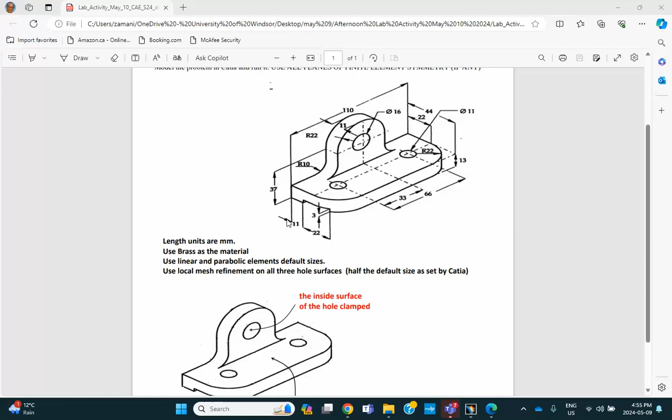Now you're told that you have to use as many planes of symmetry as are applicable in this particular problem. In this problem, it is obvious because of the nature of the geometry and the loading, there is one plane of symmetry, and that cuts this thing into two halves.

So what I'm going to do is make the whole model and then use an appropriate plane to split it or cut it into two pieces. If you want, you can also make half of it, but for me it's easier to make this thing exactly like what it is and then cut or split it into two pieces.

Okay, so the geometry is here, the dimensions are there, and I'm going to look at my paper, not go back and forth between these things.

So the strategy I'm going to follow is first I make this base - you see that base is the horizontal piece - and then add this tombstone shape to it, and eventually make a hole here by cutting it, pocketing it to create that little indentation at the bottom. So that's my strategy.

First, we start with the part file. Please make sure you save it immediately in an appropriate place.

So file, save management, save as. I've already made a folder called afternoon lab activity, May 10. So I'm going to put it there, and it's called part one. Make sure you don't overwrite other things by just being lazy and calling it part one, because there may be another part one there that you're going to get rid of if you do this.

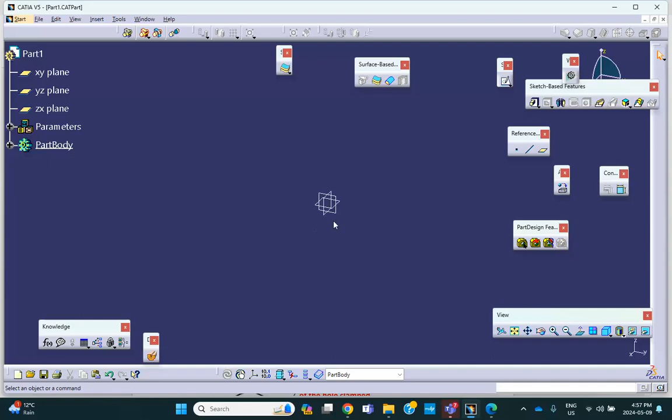But anyway, that's fine. So the units - assuming the units of this thing are millimeters - I have already changed my units to millimeters. You already know how to do that.

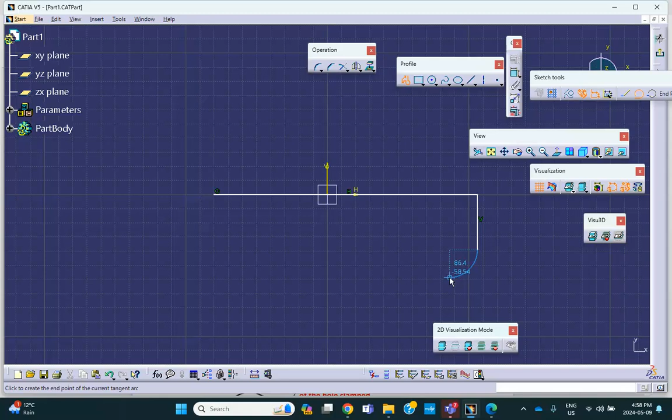So on that horizontal plane, I will sketch something that resembles that piece. Right now I'm not very fussy, so I'm just going to make something and then clean it up in a minute. Something like so, and there.

Okay, so let's see now: left line, control, right line, control, middle axis. I'm going to make it symmetric.

Okay, that's good. And then how about giving some dimensions here? Let's see now - this is 24, this is 20, sorry 22. So it looks like this size is 22, and so is this one. 22. What else do we know?

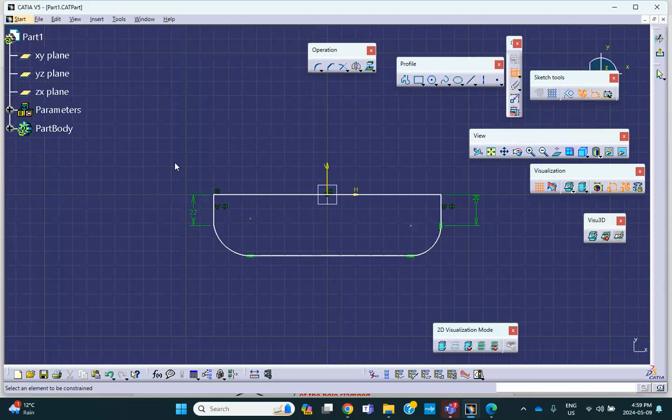These radii are also 22. This radius is 22. And this radius is also 22.

All right, and I want this thing to be tangent with that. So this left line, control that arc. And then I go here, make a tangent.

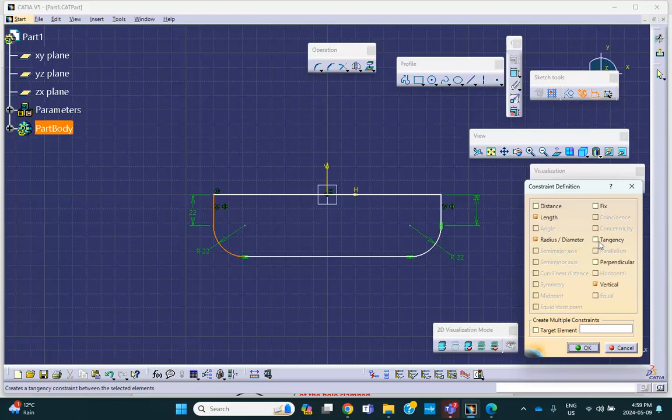All right, and what else do we know here? The whole thing is 110 - not inches, millimeters. Okay, and that's pretty much it.

So we also have two circles at these locations. So one circle like that, and the radius of that circle is, by the look of it, 5.5, for diameter 11.

So this is going to be diameter 11.

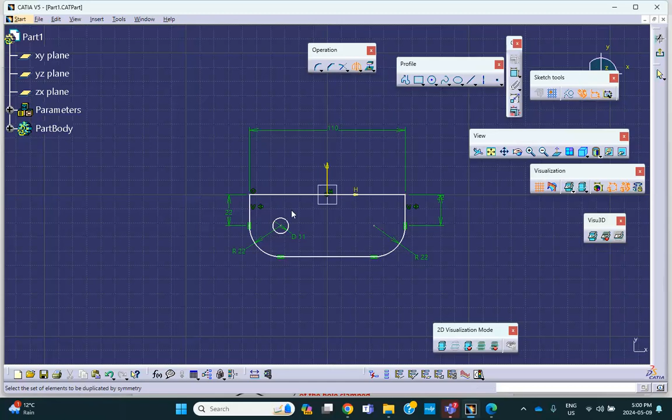Okay, and because I'm too lazy to make another one on this side, I'm going to mirror it with respect to that vertical axis. So here's the mirror option, this with respect to that, so over on the other side.

I think that's pretty much it. So exit.

And we pad it - you can look at it like this if you want. We pad it by 13 millimeters in the other direction. 13.

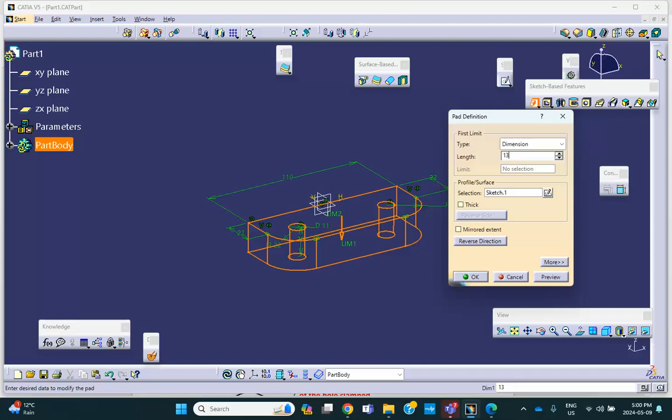Very good, so that's what we have. Now I'm going to make that tombstone on that side. So on here, I'm going to sketch.

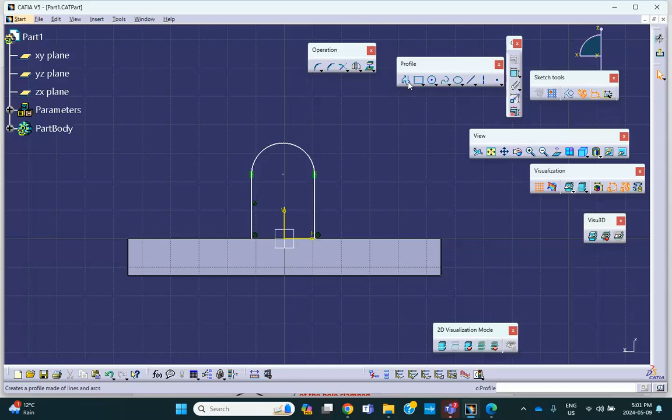All right, so it looks like I have something like this. We'll clean it up in a minute. Let me actually close this - close meaning using a line from here to here.

Okay, and then you make it nice and symmetric: left line, control, right line, control, middle axis. You make it symmetric.

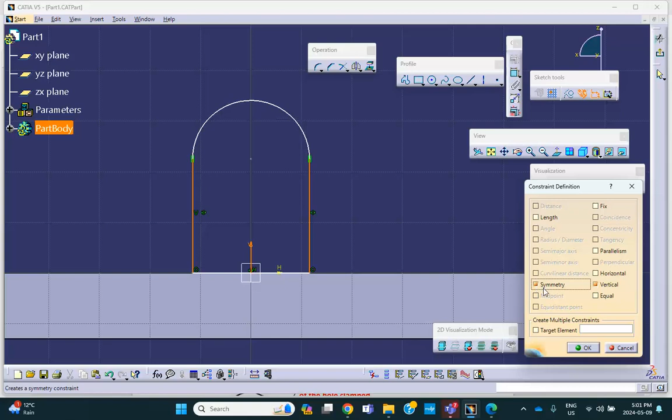Okay, and now we put some dimensions here. So for example, let me see the dimensions. Let me also draw a circle there. The radius of that circle is 8, or diameter is 16. So this is diameter 16. Okay, the radius of this circle is 22.

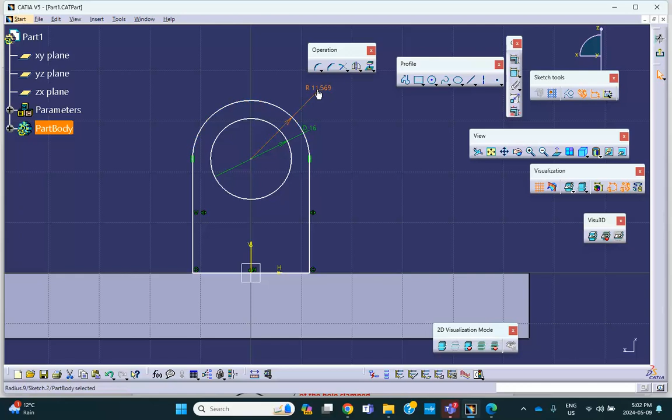Okay, now let's make sure we know what these heights are. It looks like the distance from the center of this to the bottom is 37. So I'm going to make a dimension from the center of this to that bottom line: 37.

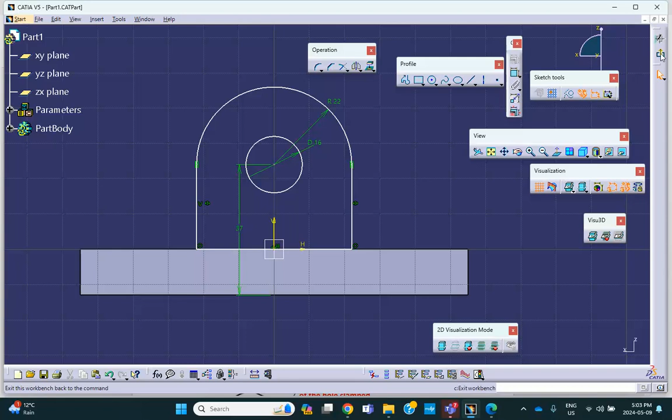Okay, I think this is actually what we've got, so exit. And then the thickness of that, the thickness of this thing after padding, is 11. So this is 11 in the other direction.

Okay, good, now we have some fillets here. We can use surface fillet. Actually, it's not called surface fillet. It's in the dress up features toolbar. What is it called? Edge fillet. So I select that guy and put a radius of 10 based on the drawing. The radius of this fillet is 10.

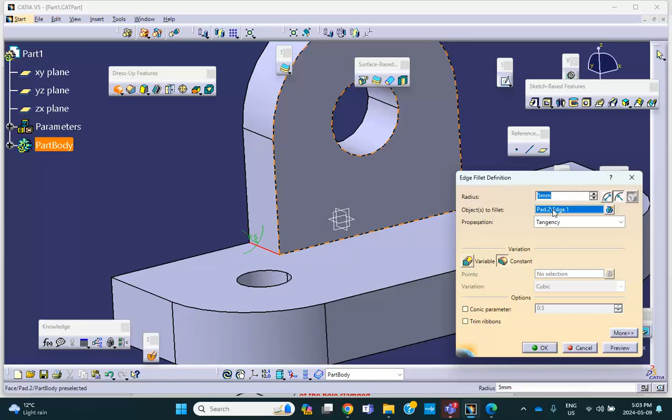Okay, same thing on the other side. I can mirror that on the other side, but the easier way is just to do this. So we're good, I don't think I've missed anything. That's what we got here. Okay, oh yeah, the pocket.

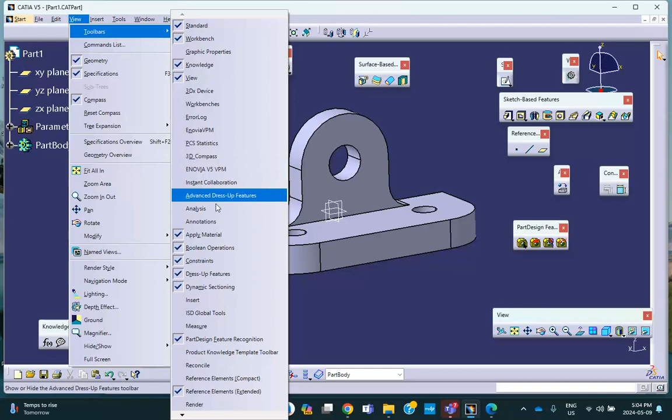Let's make sure this whole thing is 110. I think I made it, if not we're going to measure it. So where is this measuring thingy? The measure icon, I don't see it here, so maybe it's closed. Let's go to view, toolbars, is there a measure somewhere? Yeah, measure right there. So measure the distance from this point to this point, should be 110, and it is 110.

That's good. Now we're gonna apply material to this. This thing is made of brass, we're told it's made of brass on that part. If you want to know the properties of brass in the lab, you can double click on this thing and it opens up, gives you the properties: Young's modulus, Poisson ratio, etc.

Now I can't do it because my system administrator told me I need a service pack, because every time I double click on this thing it crashes. But in the lab I think they have already installed that, so not to worry about it, this is there. So I'll just use the default properties, I don't need it now. Let me click on the floppy so that everything is saved.

All right, we know that there is a planar symmetry, and the way I did it, I managed to make sure that this is a planar symmetry. So I get there, I go to the split icon right there, and you select this vertical plane. Doesn't matter which side I pick. I say okay.

Oh geez, I forgot to do that bottom pocket. So let me control Z this. Control Z, control Z. Okay good, on that vertical plane I will sketch.

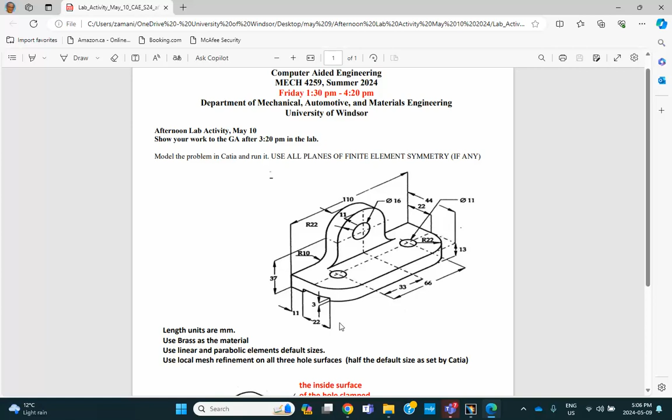Now, because I forgot to do this pocket down here: 11 millimeters this way, and then 3 that way. This 22 is already taken care of because of that radius, no problem. So we go here, we draw a rectangle.

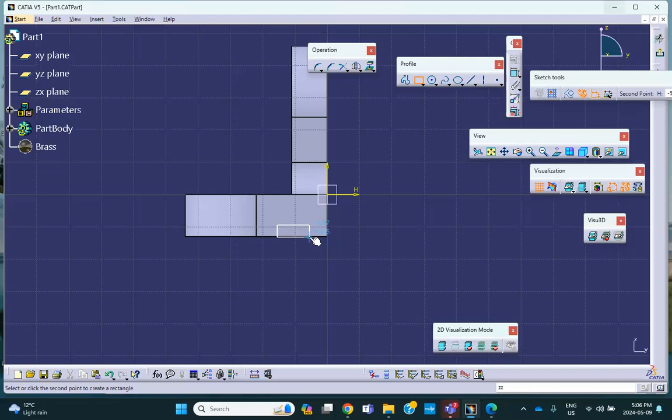Where am I? I'm going to go and draw it on, for example, yeah okay that's fine. On that face, normal view, on that face, draw a rectangle. We're going to clean it up, not to worry. So first of all I want this thing to be on there, so I select this, select that with a control key, and I say coincidence.

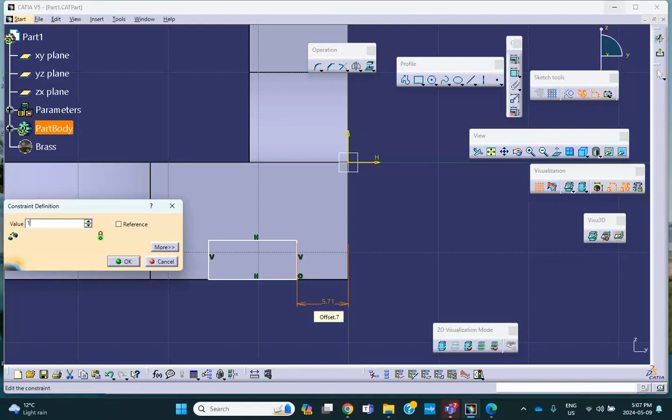The distance from here to here is 11. From here to here is 11. The whole thing is 22, I think this is 22. Back there, it got out by accident. This dimension is 22.

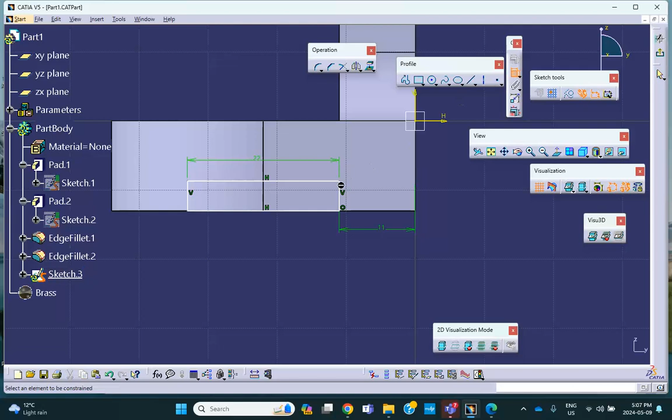And the height is 3, yeah the height is 3 millimeters. So there we are. Exit. All right, and then we pocket symmetrically.

As long as we want, there we are, we say okay. There we are, this is the piece that was missing.

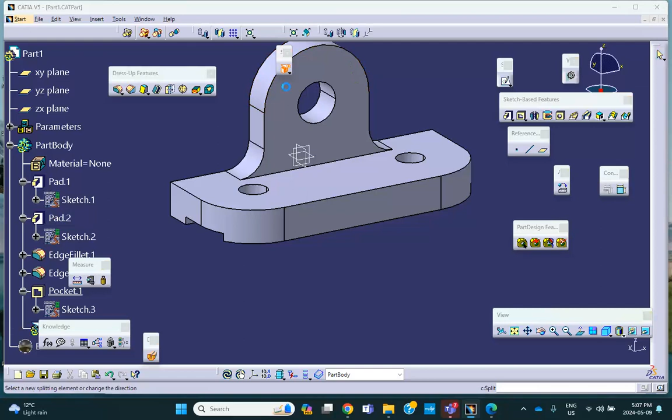And now we're going to split it. So where is the split? Split with this vertical plane, doesn't matter which side we pick, and it's going to be right there. Okay, so let's save everything, click on the floppy, it saves everything. This business of saving is critical because on the test you have to give us the stuff.

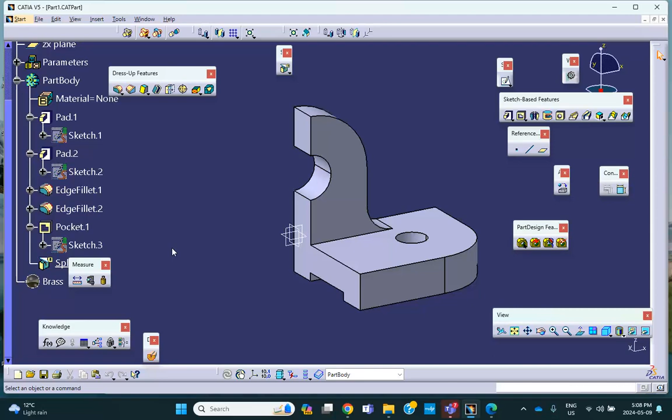Incidentally, when you do finite element analysis, if you were to submit your results to me for marking, it would be both the part and the analysis file. We haven't done the analysis file yet, but the part and the analysis file are a must. Okay, so now we go to do the analysis, start. Where is that? Analysis and simulation, generative structural analysis.

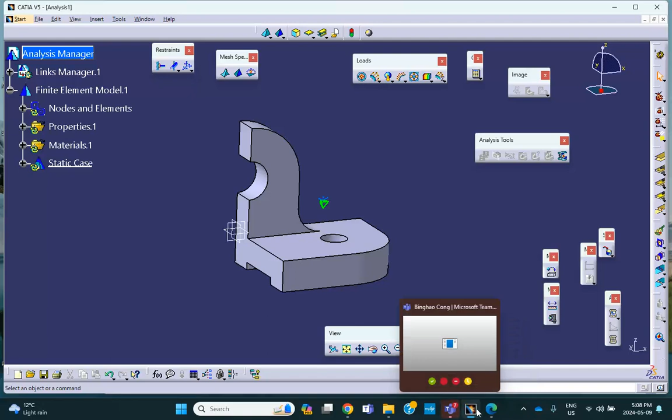It's a default static analysis, and let's read the instructions here. Let me change the rendering. Okay, let's read the instruction to see what it says. It says, okay, use linear and parabolic elements. So I'm not going to do linear, I'll just do parabolic.

Okay, default sizes, make sure there is local mesh around all holes. Okay, half the size done by CATIA. So here's what I mean, let's go back here, double click on this.

The default is parabolic, so I'm going to use parabolic. It says use linear and parabolic, but that's okay. Parabolic, half the default size. So half of that is going to be 1.85, right? Just remember that.

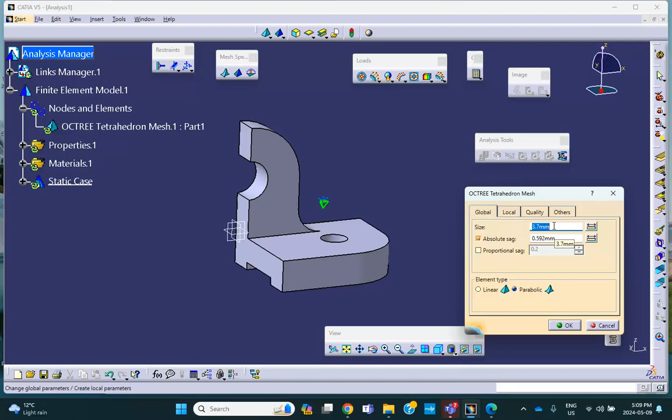So that's fine. So how do we do local mesh refinement? Here we have local mesh size on this and on that. Half of half of 3 point something, it was 1.85, right? And then notice that on this hole, and inside, and the other one doesn't matter because I got rid of it by taking planar symmetry, there's a local mesh size.

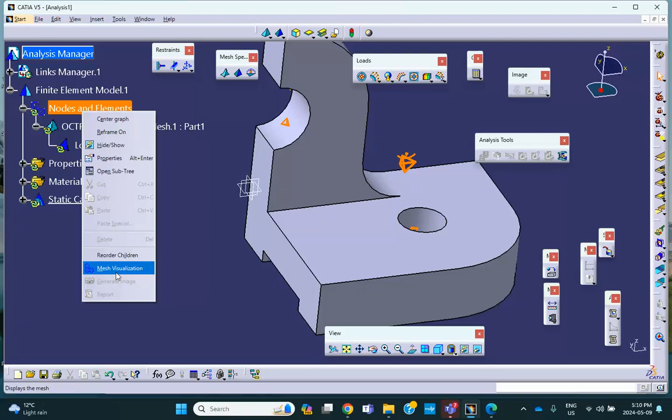Right click mesh visualization so that you can see it better. Right there, you can see that around this hole and around that hole, the elements are smaller, they're parallel. Good. So you have to deactivate the mesh because otherwise you can't do nothing.

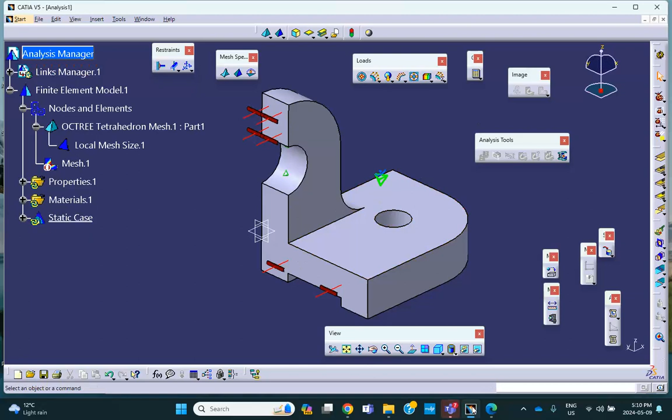Now this is a planar symmetry. So for planar symmetry, you use surface slider, one there, one there. It means it's a roller. What else do we know? It says the inside surface of this hole is clamp. So we go here, there's the clamp icon, and you select the inside surface as clamp.

You are told that a pressure of 2 MPa is applied on that face. Please make sure you don't divide 2 MPa by 2 because you're taking half of the geometry. Pressure is pressure, the surface is already taken into account. If this was a load of 2,000 pound force, then of course you'd put 1,000 here and 1,000 there. But this is pressure, so it stays as it is.

So here's the pressure icon on that face, 2 MPa.

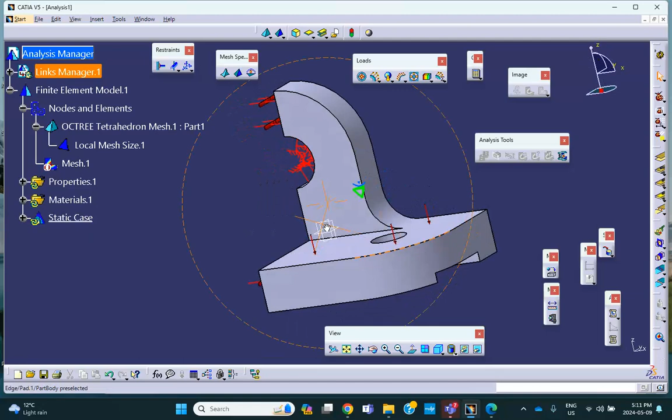Very good, save the analysis file. File, this is what I was talking about. File, save management. Notice that the analysis file that was generated is not actually saved, so it says new. Select it, save as. In that folder, afternoon session, lab activity, I'll put down analysis, that's fine. And I say okay.

And we're going to run. So click on the floppy here, or compute, and it's going to run. This is the warning message because of the fact that we use surface slider. It comes up, I don't know why they have it here. It should not be, they should have eliminated that. That's it. So this is not rocket science.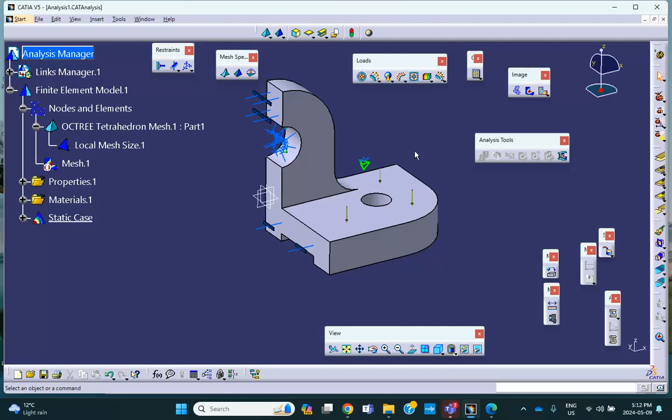When you do this thing, this is going to bend, you can see that. And these are going to stay flat because these are planes of symmetry, you put it on surface sliders. You can do animation if you want. Yeah, look, these faces remain flat because you put it on roller or surface slider.

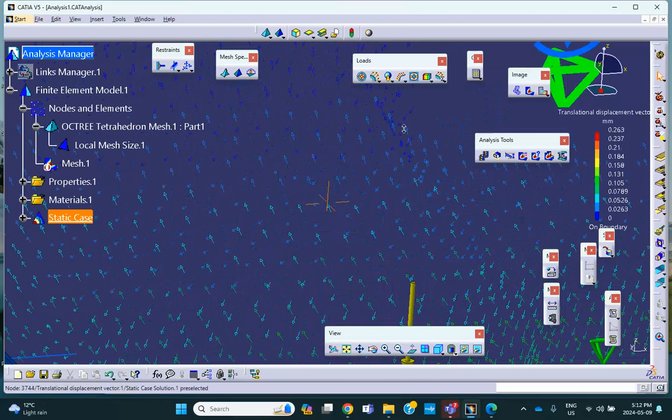Good. If you want to see numbers, you click on that. It shows you the numbers, but it gives you in the form of arrow. Double click on that, use average ISO and change the rendering. The color is already there, you can see these lines in different colors, but change the rendering to material shading so that you can see nice colors. And obviously, the biggest displacement here is 0.26 millimeters.

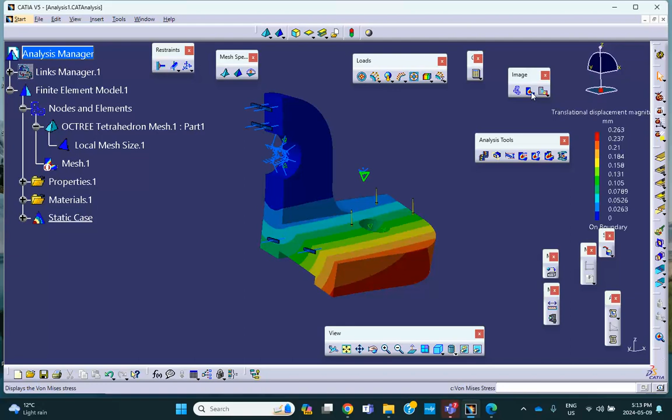Remember, this is a gigantic piece of steel, thick, 13 millimeters, about 1 centimeter piece of steel. You don't expect a lot of deflection. But if you look at the stress, this is the stress distribution, 350 megapascal.

Now, if this is steel, let's think about it for a second. The Young's modulus for steel is 200 gigapascal, right? 200 gigapascal. So in terms of megapascal, that is 200,000 megapascal. Knock down 3 zeros, you get a rough estimate of the yield strength: 200 megapascal. Ooh, look at this, this is 350 megapascal.

So assuming that we trust these numbers, this point is going to yield. And when you think about it, let's see how much force we actually put in there, okay? The problem is done, it's just that we want to see whether these numbers make sense or not.

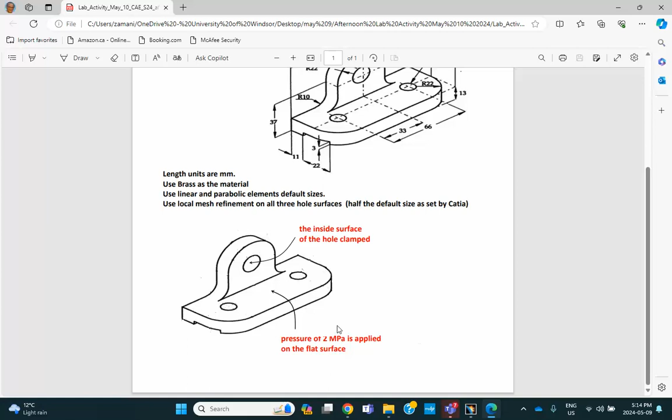So if you look at this area, this is 10 centimeters by, let's say, 3 centimeters, something like that, okay? You can work it out: 10 centimeters is 0.1 meter by 3 centimeters is 0.03, so that's 0.003 meters squared.

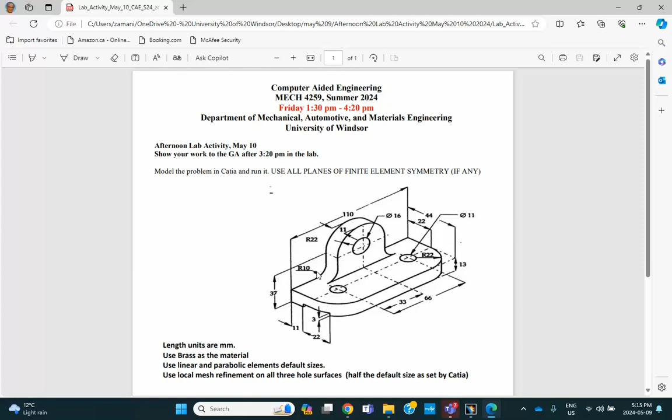Okay, so if you take that and multiply it by... this is meters squared by 2 megapascal, so 2 times 10 to the 6 Newton per meter squared. So that is going to be, 0.003 times 2 times 10 to the 6, work it out. That's going to be a big force, a very big force in terms of newtons.

So anyway, it doesn't surprise me that the value of the stress is that high. And of course, all bets are off because we're assuming linear elastic analysis, but suddenly the maximum stress is bigger than our yield strength. So just be careful, it's very easy to generate good-looking garbage.

Please work out the approximate yield strength for steel, check it out. I'm pretty sure it exceeds that. I don't have a calculator here, so I'll leave it to you to decide. If they pay you to do these things, obviously just generating color is no good, you have to sit down and see whether it makes sense or not.

All right folks, good luck. That's pretty much it. Make sure you save this thing, because if this was done as an exam problem, you not only have to give me the part file, you have to give me the analysis file, both of them. All right.